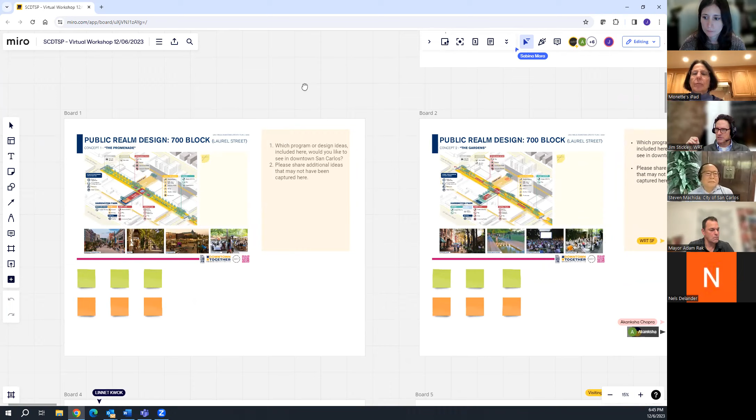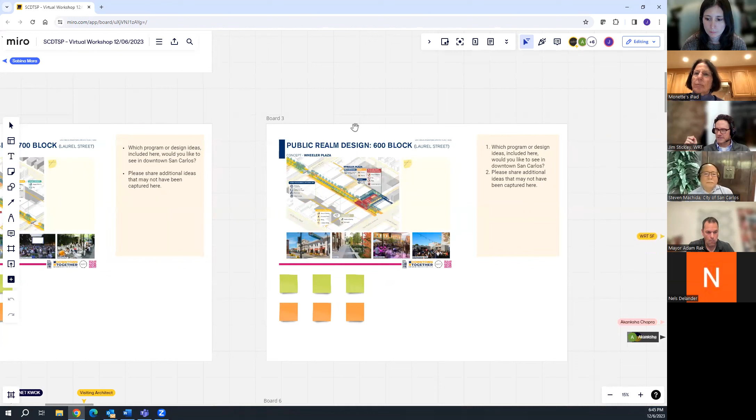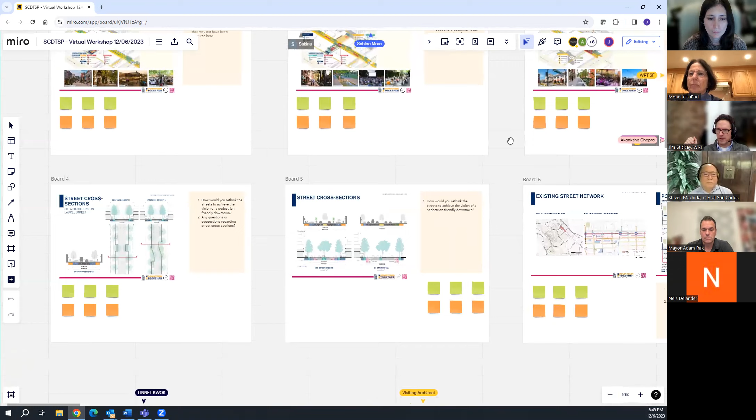It starts with guiding principles, as you can see here, as the first board, and then we're going to go down to the 700 block schemes that were presented as part of our presentation. So we've got those two different alternatives, the promenade and the garden, and then we're going to go ahead and spend a little time on the 600 block, which I think can also be representative of the 800 block with some of the ideas. And then we have, for reference, some of the cross-sectional studies that you can see here across these three boards on the bottom.

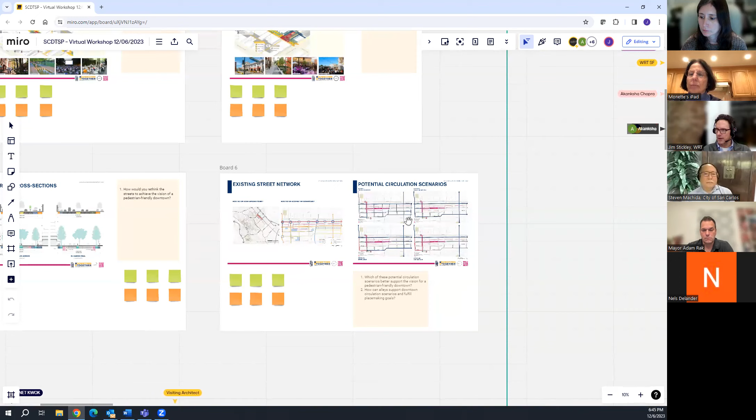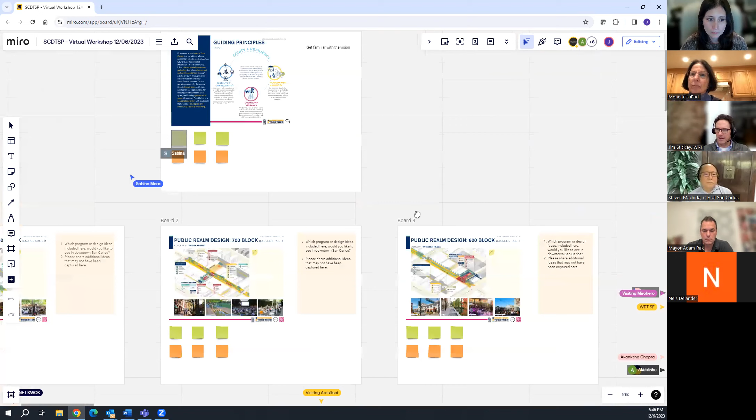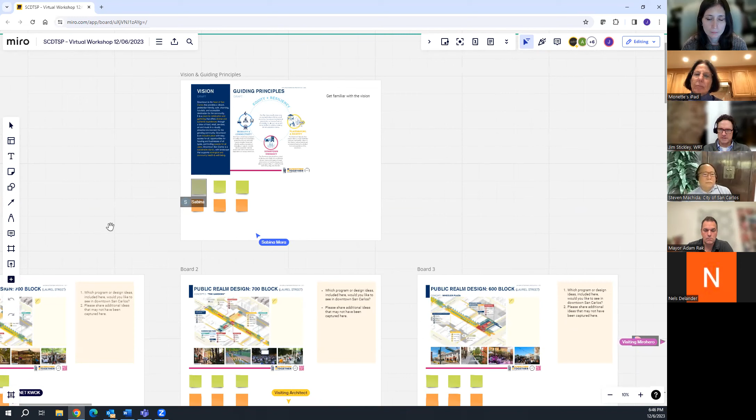And then lastly, these sort of four circulation options that are looking at the bigger picture of how people move into and around downtown in order to protect this pedestrian core. So we don't want to be too strict about having to have comments on every board, but we would like to cover the range of ideas here if possible. But certainly if people want to focus in certain areas, we're free to do that.

Yeah, I just want to open it up. Sabina is going to take some notes as we go. Are there any sort of general thoughts about just what's driving this? What kind of downtown people are really interested in having, something that might be more on the level of the vision and the guiding principles? Just sort of general comments about intent of what people want for San Carlos in their downtown. Anything on that?

Okay. All right, well, maybe we got that pretty close in the vision statement.

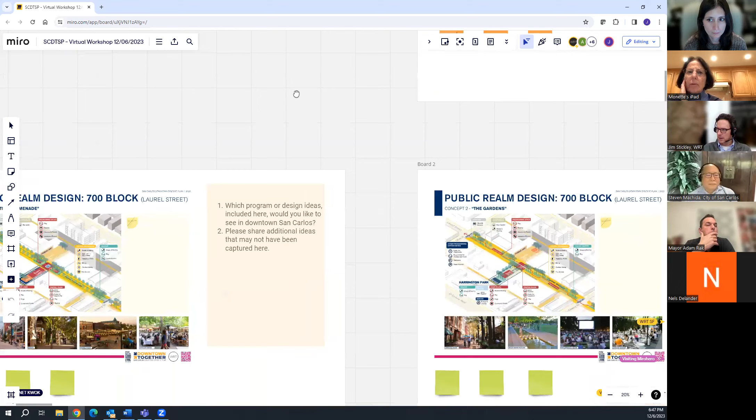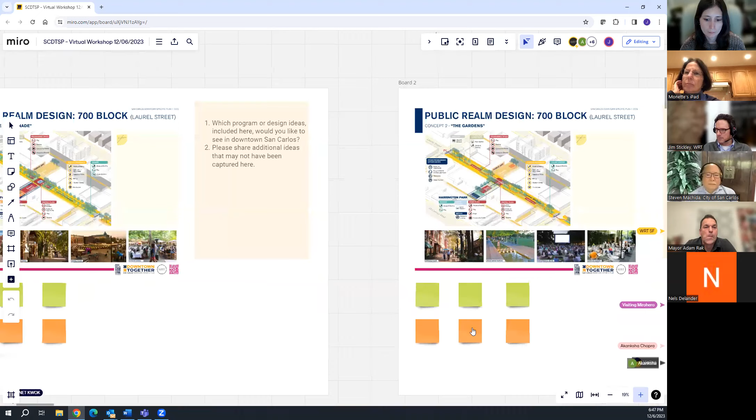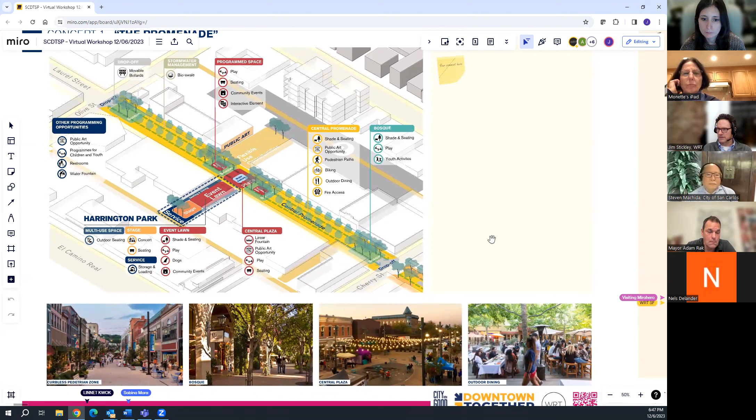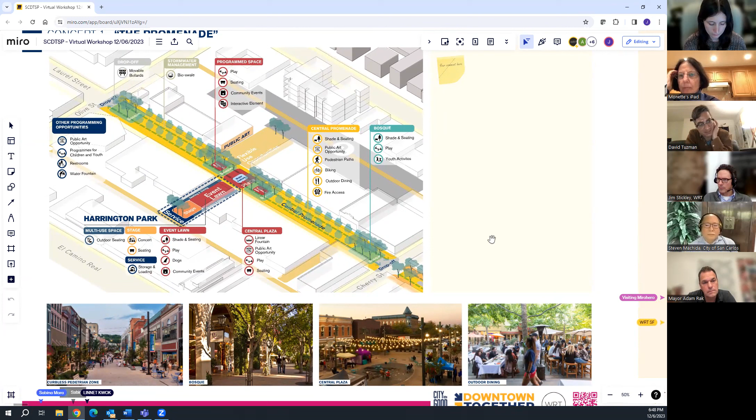Any thoughts about these two different approaches to the 700 block, the promenade versus the gardens approach? I can zoom in on each one individually. What we're looking at here is not only the physical arrangement, this very urban and linear versus a little bit more garden-like, but also the kinds of program elements that are important. What do we want to make sure we don't miss in terms of the activities and the types of spaces that we want to have downtown? Any thoughts on that? Honestly, it's hard for me to see the difference between those.

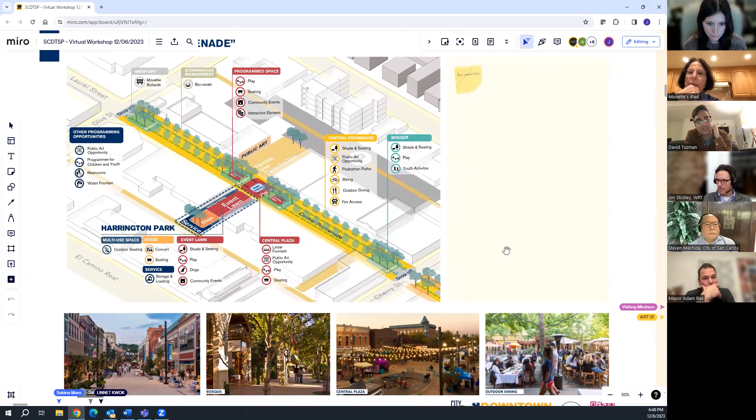Okay, I can. It might just be because the diagram, the vast majority of it is just the white blocks. Yeah, like the tree cover has subtle differences. So yeah, well, that's really what it is. This one, if I zoom in a little bit more—I don't know what kind of screen you're working with—but this one is just more linear. It's more urban, it tends to be more of a formal promenade.

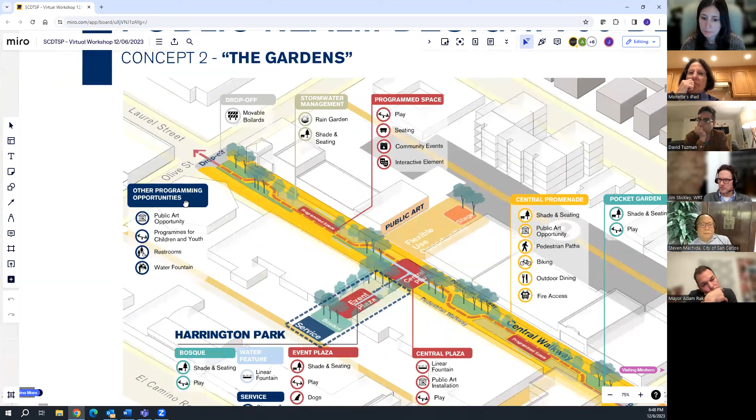If you think of Las Ramblas in Barcelona, it's that sort of arrangement. Whereas this other one is a little bit more organic. These groves of trees are grouped on one side or the other, and then the path through the space sort of snakes back and forth between those groves. That's not to say that we wouldn't have a similar amount of space for programming, for outdoor dining, but it's just a little bit different feel. This has got a little bit more of that park element introduced and a little bit less of that formal urban plaza. So I think those are the main differences.

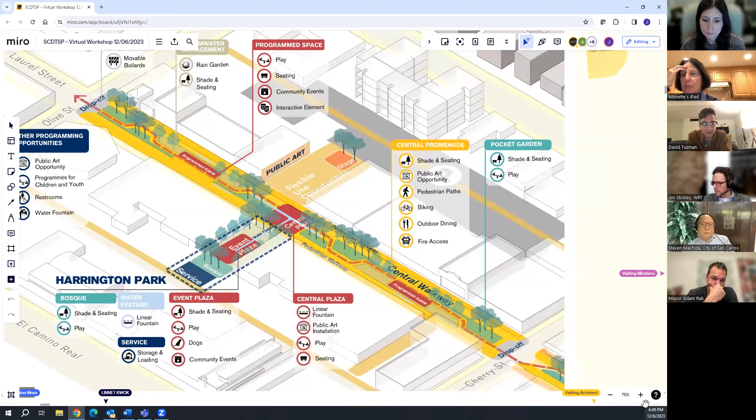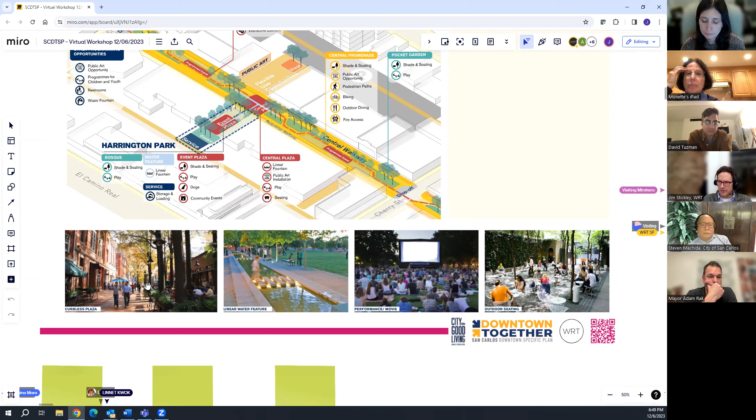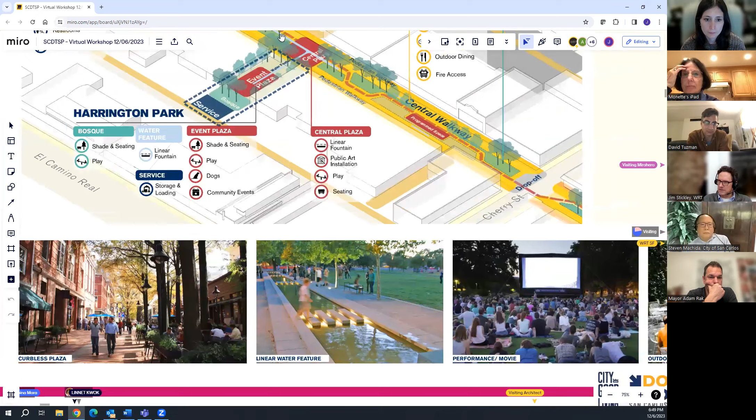Do you scroll down to the pictures? Yeah, absolutely. Those look—so this one shows this idea of the groves that are either on one side or the other, right here where it says curbless plaza. And then there's this idea of a linear fountain, which is more in this central plaza space, and then event spaces for outdoor movies, plenty of space for seating, and, it's not shown here, but a robust border area on either side for outdoor dining.

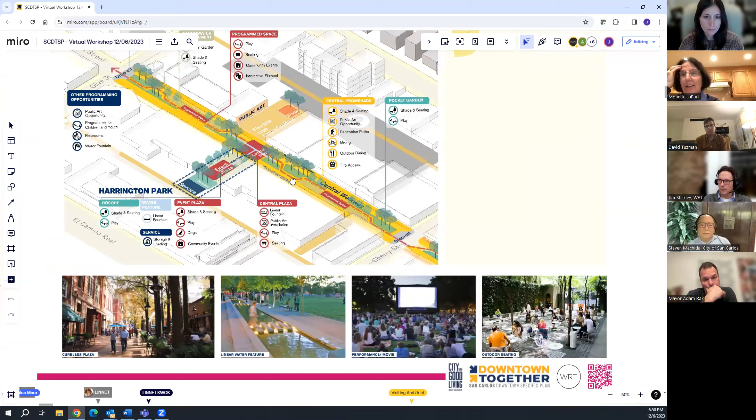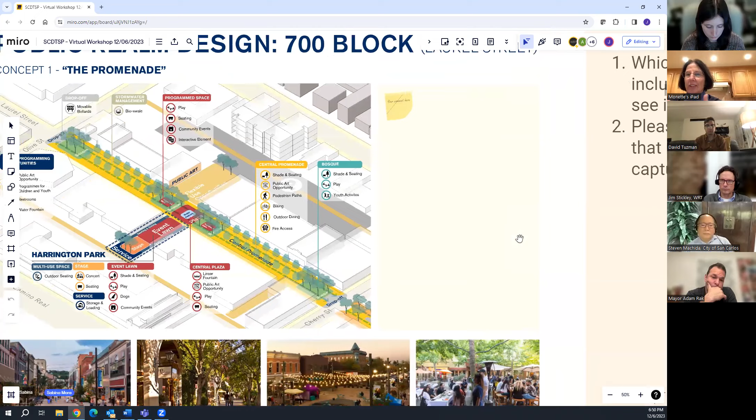I like the linear approach personally. I think it gives equal access for all the businesses, as opposed to some that have the trees more in front of them and back and forth on the other side. So I feel like it's more equal for all the restaurants and all the businesses. But that's my personal take on it.

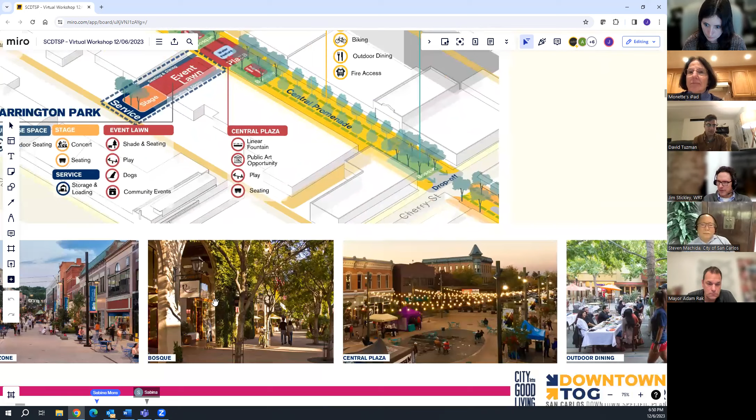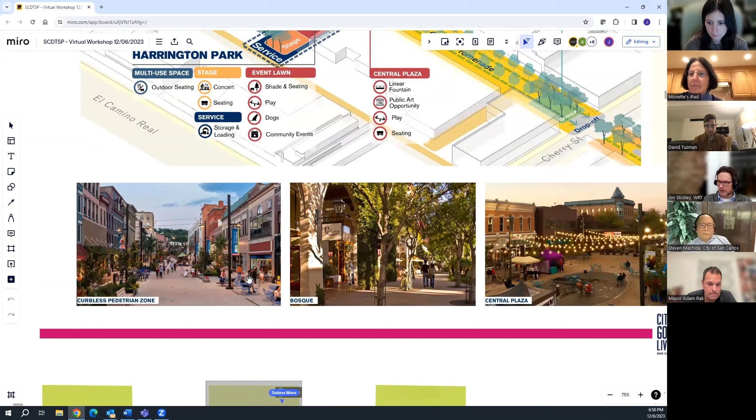Yeah, and here's some images of what that could look like. This is one from Ithaca, and it's more formal, a little bit more linear. As you say, Monette, maybe a little bit more equitable in terms of the amount of space allocated on the edges for outdoor dining.

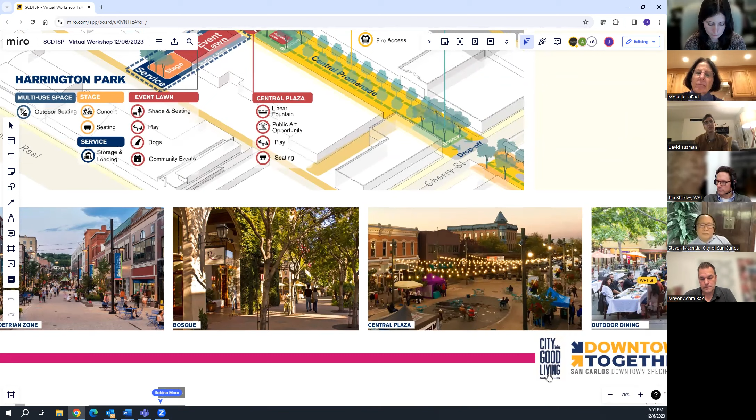I like the idea of having it sort of winding, in a way that if you're standing on one end, you can't really see through to the other end. I'm talking about the other one, just to be clear. There's sort of these pockets of little different character tucked into the block.

In the best cases, it would make it feel sort of cozy, compared to, I'm thinking of in the middle of some days walking down Laurel Street now, when there aren't a lot of people there, it feels sort of empty. It has a huge potential to be huge and bustling, but it's not there when you go there.

So I think if it's winding, your line of sight always has a tree or something a bit smaller in it, so it doesn't show this feels more vibrant, easier. It's a notion that a space is successful whether it's filled or empty, that it has a certain scale to it, and it doesn't feel abandoned because there's enough vertical and enough articulation of some sort.

And maybe what would be important on a scheme, to Monette's point, is that where the path comes close to the outside edge like this, we still want to make sure there's a minimum dimension there that accommodates outdoor dining, so that this guy over here doesn't get a huge amount of outdoor dining. That was not very well drawn. We want this frontage over here to still have enough to do their dining operations.

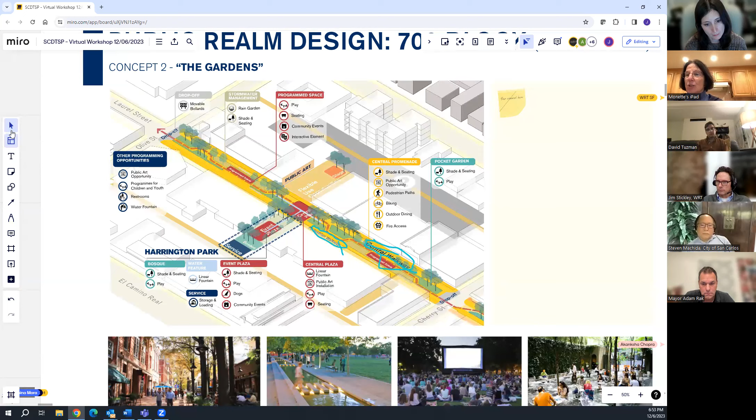That's part of it too. I was thinking it gives you more of an open space in the middle to have all the activities that we try to have now at these other events when the street is closed. Seems like it would be a little more.

Yeah, so certain activities, you're saying Monette, really need a nice big space where those activities can manifest, whether it be this space or maybe the central plaza space, but there's enough there where you can really have an event, and it feels like there's a critical mass of activity associated with that event.

Yeah, because on Halloween night, they have things for kids to do, and all these things that are set up in the open space. So it just seems like it lends itself more if it's not quite so weedy and windy. Yeah, that you've got some spaces that are big enough to be flexible and accommodate those different kinds of activities. Yeah, that makes sense.

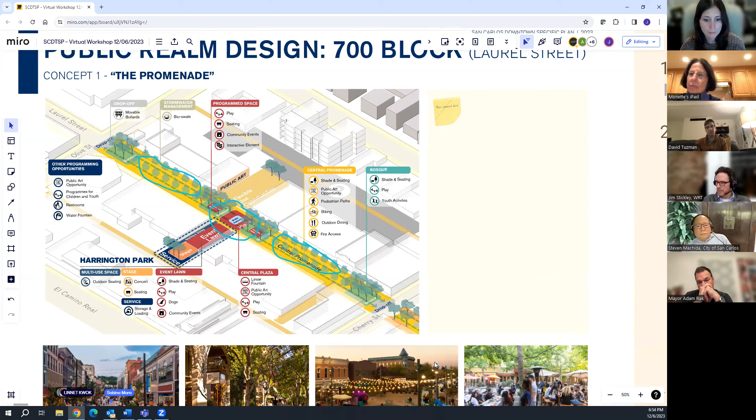Since it does mention fire access for both options, does that mean that the smallest part of the gardens would still be quite large, large enough for a fire truck or other emergency vehicles to navigate through? Exactly. So, I forget the exact width requirement, Steven, you might have to help with that, but if it's 25 or 26 feet, that would be the minimum you would need in any area that goes down to a central pathway, so that emergency vehicles could still circulate through there, and that would meet your code.

Right, Jim. The width they need for all the outriggers is typically 20 feet. Okay, 20 feet, there you go. Right.

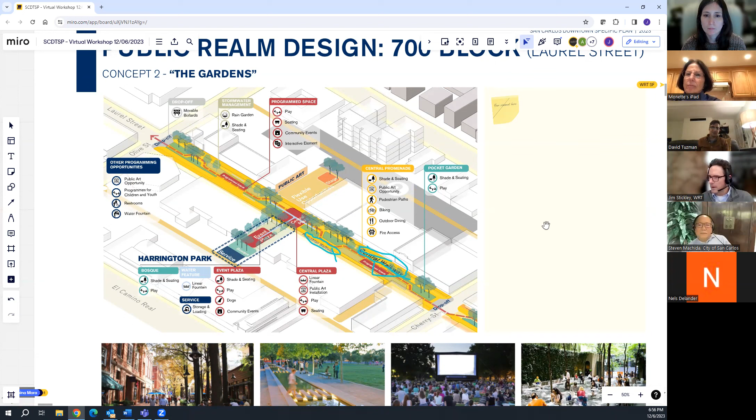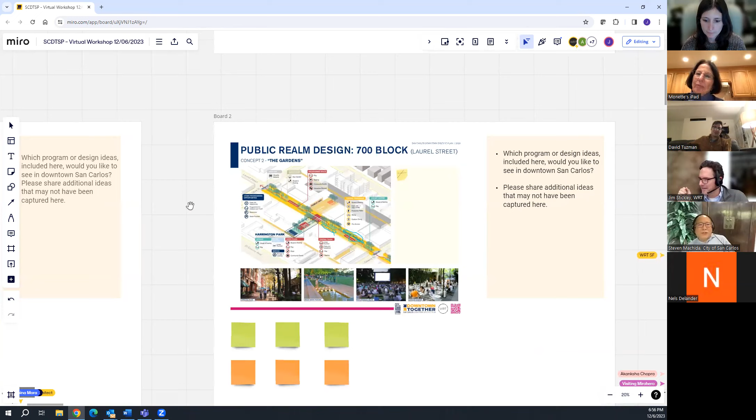One thing that I'd really like to see in general is more public seating, not just seating but like a picnic table kind of thing. If I take out food or bring my own food, right now there's only Harrington Park and the few chess tables and stuff like that. So more just open public seating. That could be in a bench format, it could be in a table and chair format, but it's non-proprietary. You don't have to sit down at a restaurant to have that.

You can just go and have those spaces on your own with your own food, particularly with a surface to occupy that space, or spend time on your computer, or do something, rather than a bench which is nice to watch things go by and talk one-on-one with somebody, but it's a bit more limited. Tables and chairs, I mean, that's done a lot in public spaces, just public tables and chairs that are out there. Of course, we'd need to think about how those are secured, and is there management capacity to put them away each night, or do they need to be fixed and permanent. But there's many ways you could do that and have the kind of spaces you're talking about.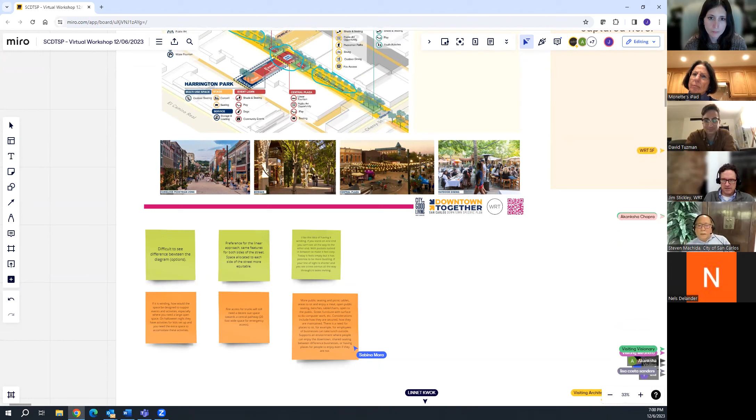Steven, do you have a sense of how some of these public space contracts would work? Basically, all our public contracts - I'm the public works director - have to go through prevailing wage requirements. That's a state law we have to follow. So we want to ensure the contractors hired follow prevailing wage and offer their employees appropriate benefits.

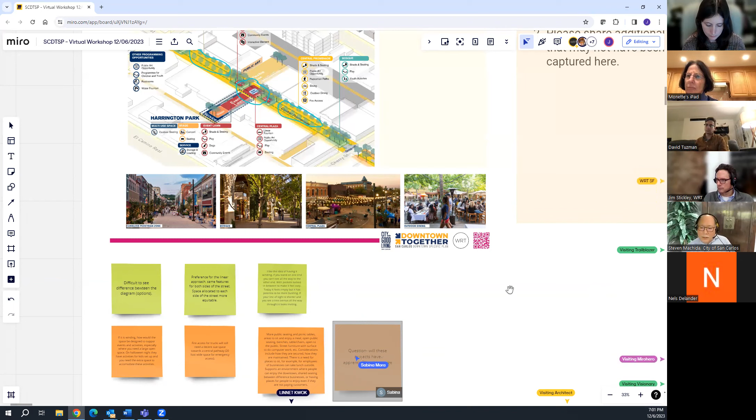It's like apprenticeships too. We want people who live in the area to go through apprenticeships and work in the area that they live in. That's one of the important things with the carpenters over at 217. We want labor standards implemented in a lot of these projects, so they have opportunities for the people that actually live in this community to go to work.

Certainly we would always consider that, and as you pointed out, this is a really big project, probably one of the bigger ones in our community. We're not quite there yet - we're still in the planning mode, gathering information from the community. But the intention is to provide a lot of new jobs, and hopefully secure local folks who could work and live in our community on this project. We appreciate that.

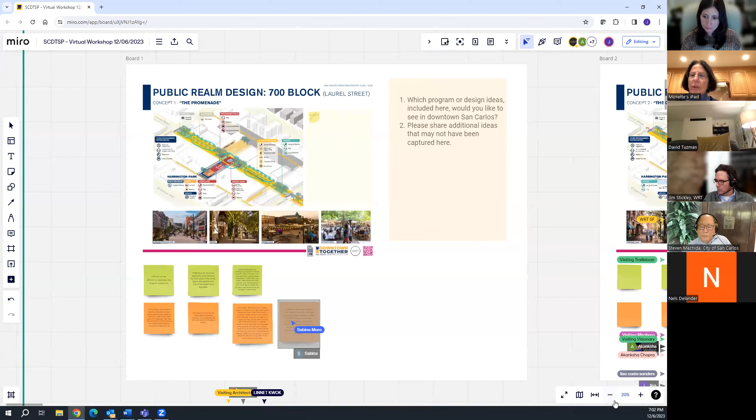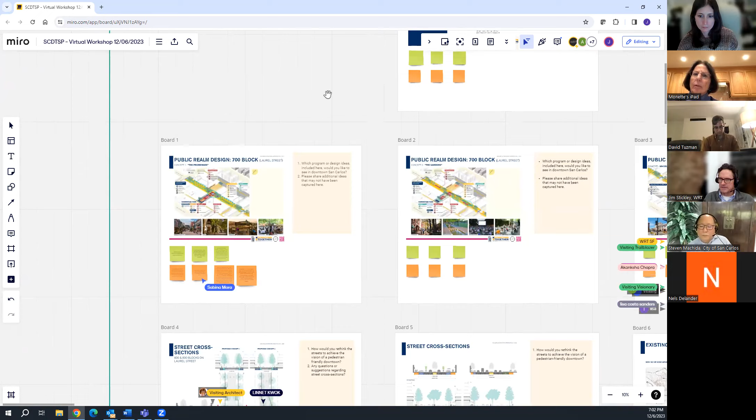Okay, so I'm going to move us ahead here - this is some excellent feedback on the 700 block. Unless someone has another important point to make, can we move to the 600 block? We could talk about Wheeler Plaza as another public space, but I'd also like to get feedback on these two alternative approaches to the street cross section.

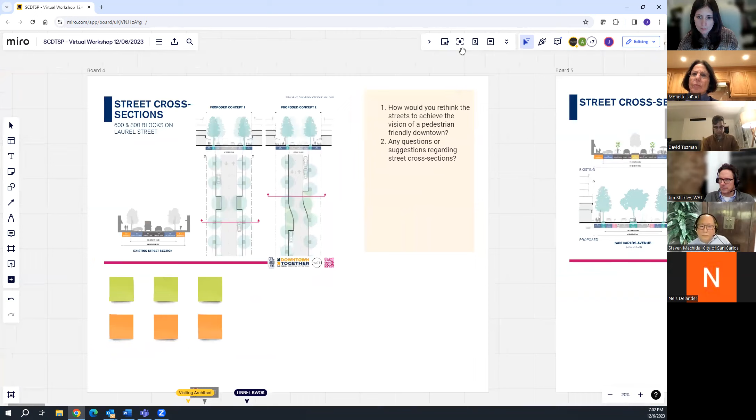If you can see this enlargement, these are two different ways of creating more sidewalk space. In the first instance, going from diagonal to parallel parking, we're getting roughly - if you look at the cross section - 9.5 plus 5, so almost 15 feet. Actually, that is 15 feet of sidewalk.

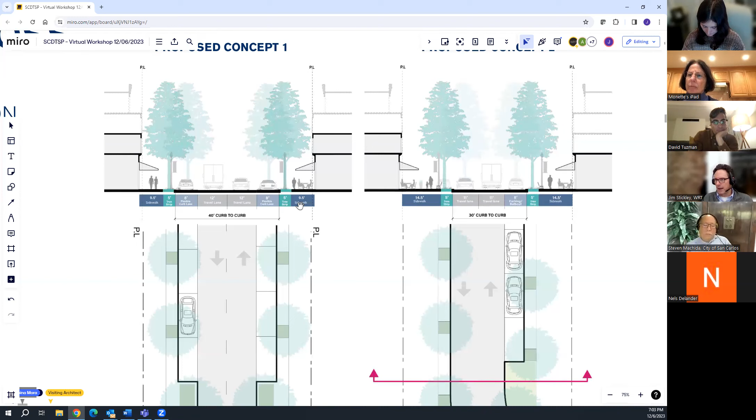Because the tree strip is paved, right? There's permeable paving on top of the tree strip, so that's all usable space for circulation and outdoor dining. I can tell you 15 feet sounds wide, but when you put a couple rows of tables out there, it gets constrained pretty quickly. But it can be done for sure, and it would be quite a large improvement from what's out there today.

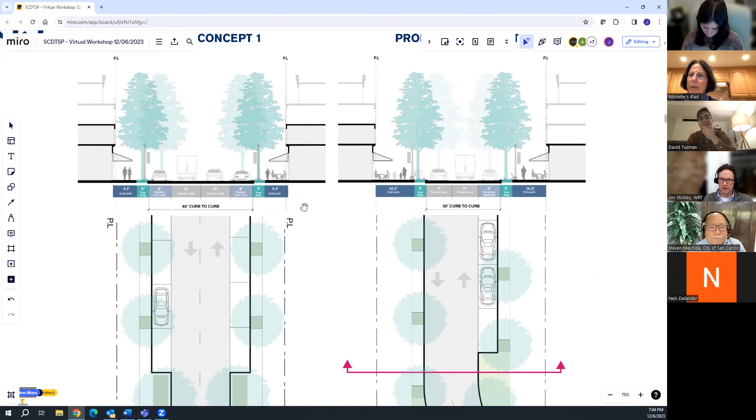What's the width today, just for comparison? We don't have existing dimensions on here, but I think it's about 8 feet total, including any tree strip. So you're going from 8 to 15.

This other option has parking just on one side, but it switches back and forth. Here you have almost 20 feet, and that starts to be pretty nice in terms of having really good, robust outdoor dining, and still plenty of room for circulation.

An important thing to note is that the idea, not only in the 700 block but in the 600 and 800 blocks, is that you can do away with the need for the parklets. Those were a response during COVID to get additional space, to protect those spaces from automobiles, to work within the constraints of a narrow sidewalk. But if you have enough width in the sidewalk, you can put the outdoor dining right up against the storefronts, so it's a continuous function with the restaurant interiors, and the circulation goes to the street side of that. It's much more typical of cities where they have very well developed outdoor dining, nice wide sidewalks, removing this whole notion of barriers.

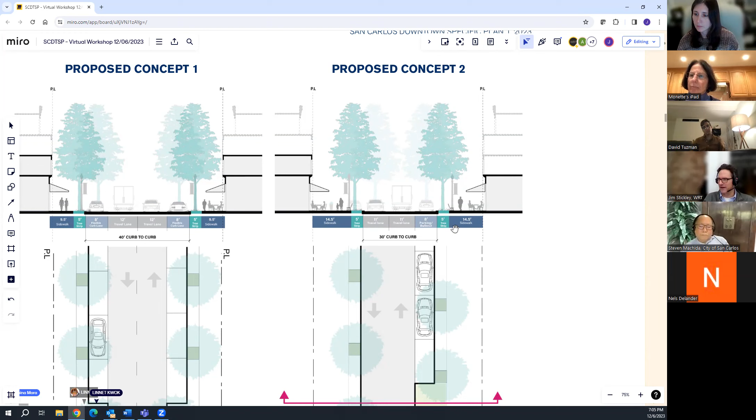The parklets, as beneficial as they've been over COVID - and I think they also awakened everyone to the potential of a lot more outdoor socializing - those are all really good outcomes. But a bad outcome is they've really chopped up our street environments and put these blockages out there. So one of these schemes would create an opportunity to do away with that and have a much more free-flowing space.

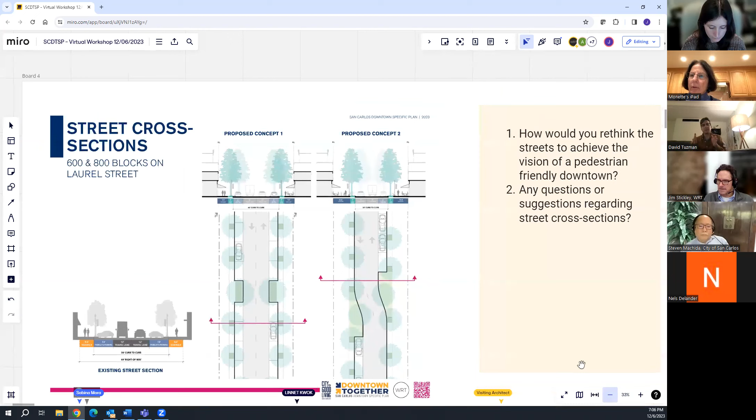So I've actually been thinking about that, exactly what you were saying, how the parklets are this sort of half solution. It gives you an outdoor space, but you have a pedestrian path cutting through the middle of it where servers are going in and out. It's not really the best solution.

Exactly. So one thing I realized, all of the parklets on the 700 block were built, I guess, assuming that cars were coming back, so they have a barrier, orange barriers. But they also have the acrylic or plexiglass at the roof, which I'm guessing is partly for staying heated, some protection from the elements.

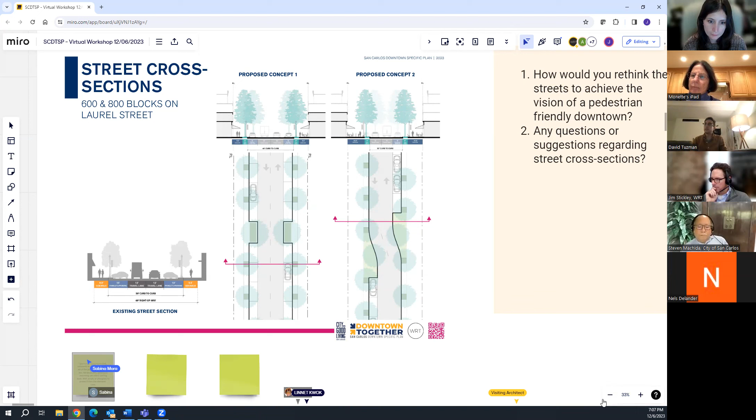Yeah, I wonder how that would work out. Because the idea of like an Italian or Parisian cafe where the chairs are just sort of spilling out, I love that. I just wonder if the restaurants and cafes here would still want some enclosure possibility, which would kind of not be so nice circulation-wise.

Well, they don't have the weather protection that the structures now have from wind and rain and stuff. But what they've done is really created like the middle of the 700 block as an alley between two, because all you see is the backs of all those parklets. You don't see any of the nice side.

I mean, I think the goal is to get rid of the parklets, but the thing the restaurants will lose is the weather protection. Although, if you think about the example of Paris, there's a whole language there of enclosure methods that they use for the outdoor sidewalks. In inclement weather, they've got these very nice enclosures.

All of a sudden, what might be an awning in the summer now has drop-down panels, and some of it is hard constructed, but some of it is just zippered panels with clear plastic. So I think it'll open up a whole new opportunity of how you get those same protections in inclement weather, but that's all built now up against the building rather than out in a little pod on the street.

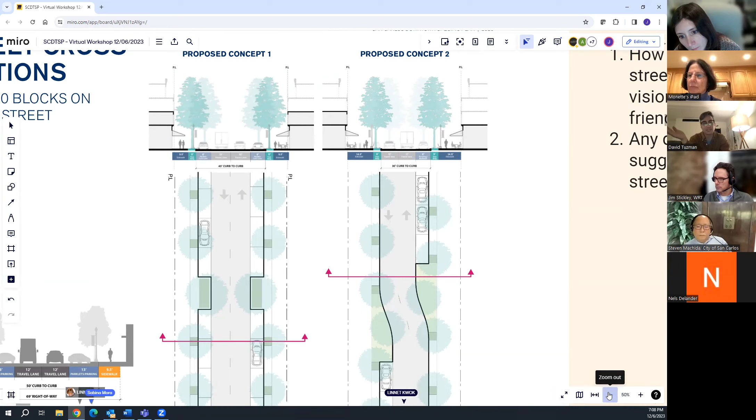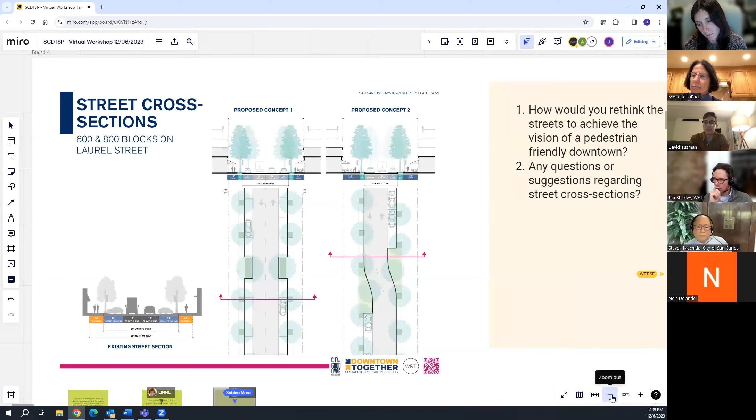It'd probably be good to have. I'm just thinking, I'm not a business owner at all, but these businesses invested money into building what they have now, and I guess getting the permits for it. And now, whenever this comes to fruition, they're going to have to completely revamp it. Which is, I'm sure they're not going to be too happy about that added cost.

And so whatever kind of, if there's some design guide, something—not guide, because that'll constrain them—but something to sort of ease into that.

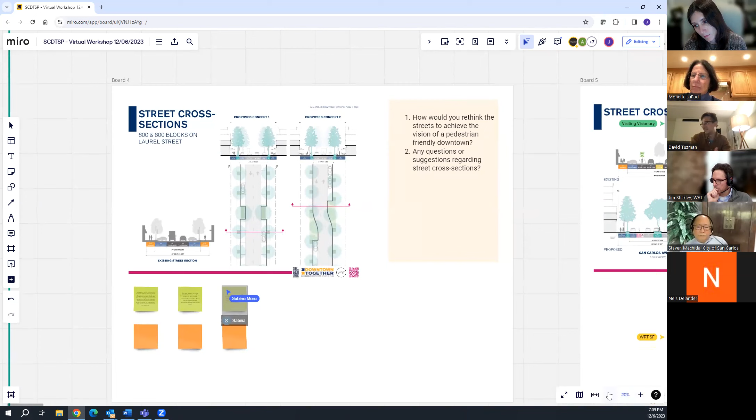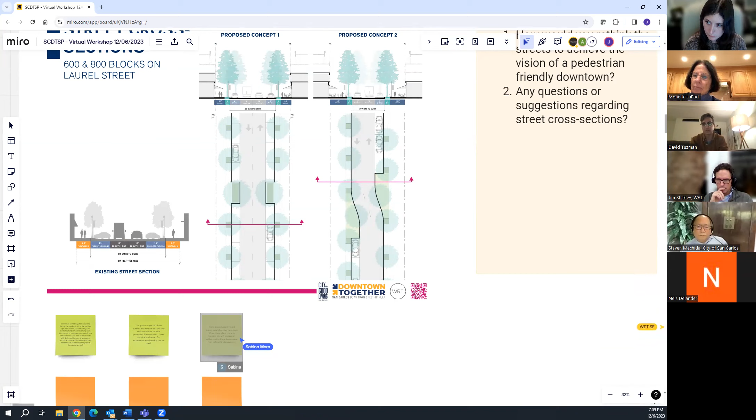Also on that note, I was talking to my buddy in San Mateo who was talking about how the city really poorly handled the switch over from deep shelter in place, hey everyone's got a parklet, to no, you need a more legitimate permit and legitimate structure. And I think just like suddenly one weekend, the city kind of forced everyone to tear down what they had currently. They were able to do that because the permit or whatever was sort of revocable.

Which I assume we have now, where the business owner doesn't own that sidewalk. And so whatever investment they might consider making to create that structure of the new nice openness, it's still pretty tenuous if the city is allowed to change the rules in a few years. I wonder if there's something to think about having that sidewalk not only have a permit, but be able to be owned by that business, or at least have an easement agreement, something like that, so it's a real sense of control and ownership, which can encourage them to keep that investment nice.

That's excellent. Can I make one comment about your parking on that first block before we lose it?

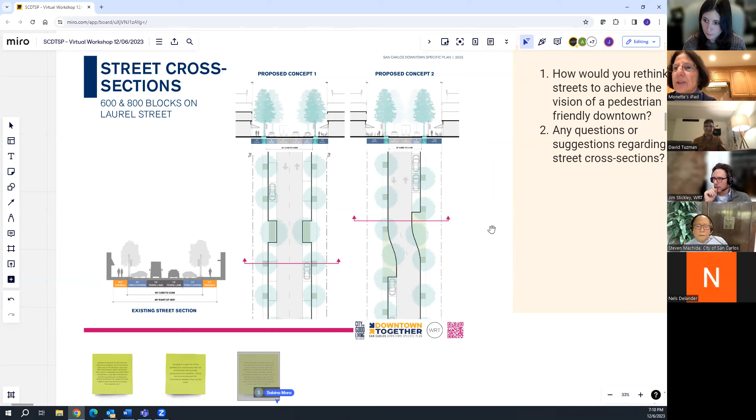Yep. If you've ever been in Burlingame and you watch, the problem with the parallel parking is that by the time somebody gets in the car to get out of that space and wait for the next person to back in, the traffic backs all the way up down Burlingame Avenue. Because it takes...